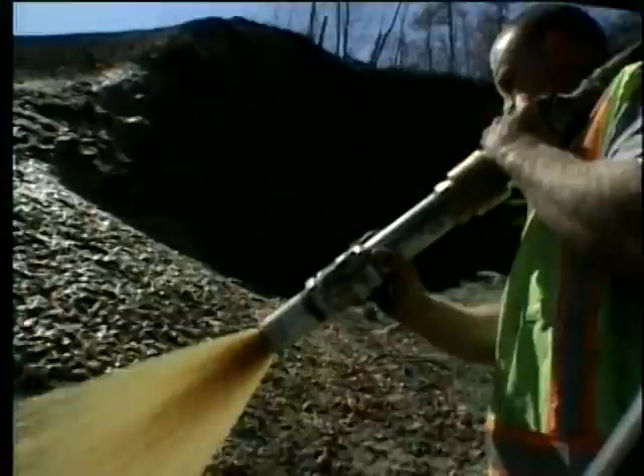MAT Incorporated and its distributor network supports our certified applicators by being there for your first application of SoilGuard and for any other project of high visibility you request. Please ask for assistance and a MAT Incorporated representative or your distributor will be on the site. MAT Incorporated exhibits at many major trade shows in the United States. We market primarily to specifiers and engineers in order to get the product on new projects. MAT Incorporated distributors will provide literature and marketing packages to you at no extra cost.

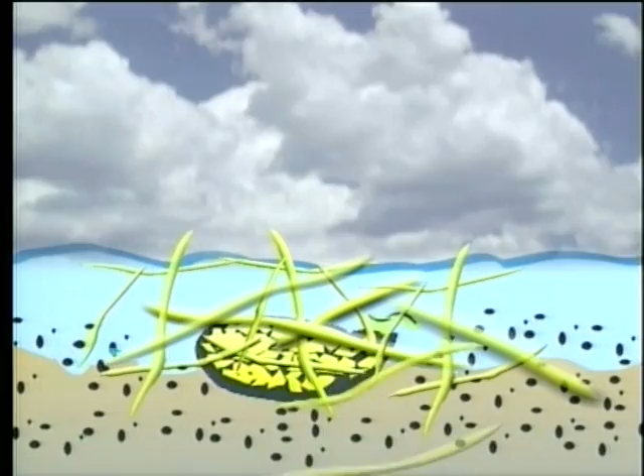What is a bonded fiber matrix? SoilGuard is a bonded fiber matrix erosion control system that provides blanket-like protection with dramatic savings in time and labor. The hydraulic application needs no special site preparation and conforms to almost any soil surface. Bonded fiber matrix is an erosion control system where fibrous materials are cross-linked together with an adhesive to create a continuous 3-dimensional erosion control blanket which adheres to the soil surface. The adhesive is a vegetable-based product called guar gum.

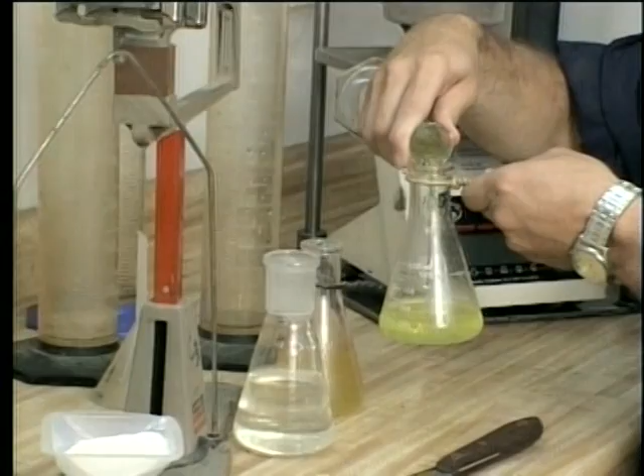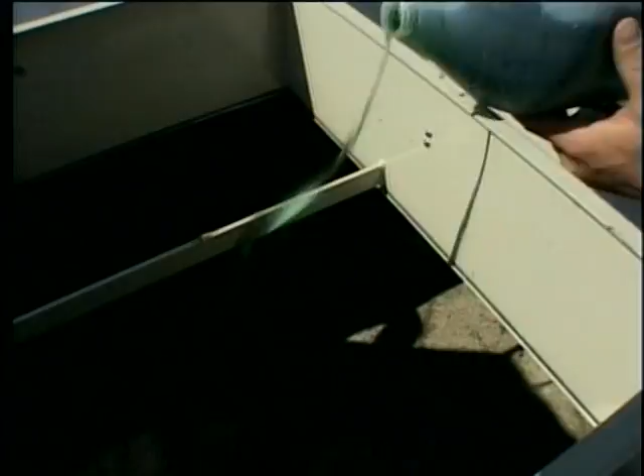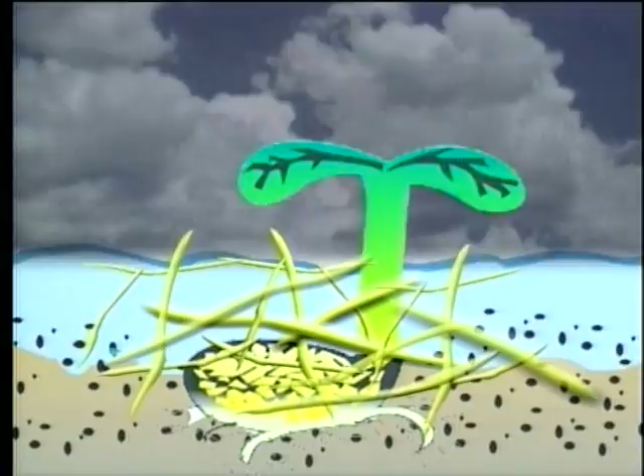SoilGuard is made from wood fibers that are manufactured longer and somewhat coarser than regular mulch for hydroseeding. The binding agents in SoilGuard are natural minerals, causing the product to cross-link together. These natural minerals are some of the same components used to make fertilizer, but are not a replacement for fertilizer. You should mix fertilizer as you usually would for each site. Once dry, the matrix becomes water insoluble for maximum protection and effective germination. After drying, it can withstand substantial rainfall, high winds, and stay in place until vegetation is established.

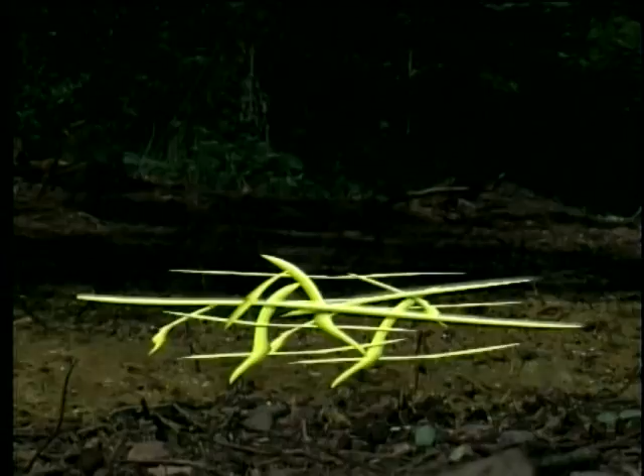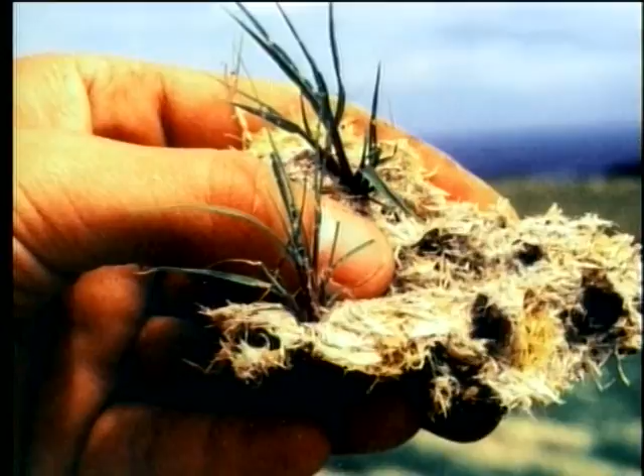Look at your demonstration sample. It represents a spraying rate of 3,000 to 4,000 pounds per acre. This is what we would normally suggest for an application. Please hold it up to the light and observe the small holes. The holes are small enough to dissipate heavy rainfall, preventing displacement of seed and soil, but are large enough to allow moisture to travel through and vegetation to grow through with ease. On the ground, the product retains moisture from the air and remains relatively soft while holding seed and soil in place. In arid climates with no irrigation, SoilGuard may remain hard, but will last until vegetation is established.

SoilGuard is not intended for the prevention of landslides on slopes that display deep-seated instabilities or that are subject to surface peeling or frost heave, extended or permanent erosion control in non-vegetative applications, as a channel liner or in areas where poor design concentrates overland water flow.

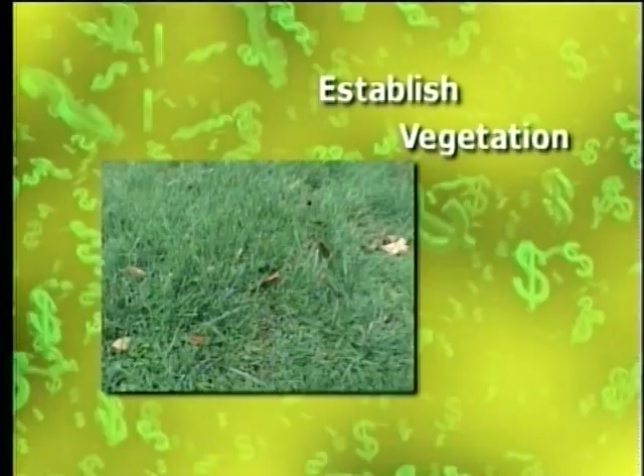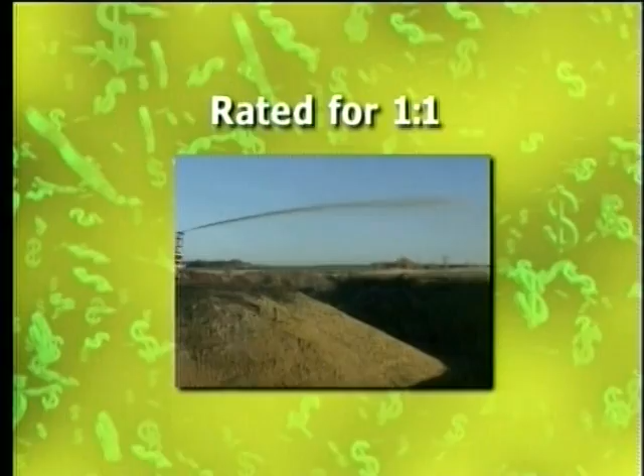Spray-on blanket-like protection eliminates the under-rilling commonly seen in rollout style blankets. Better soil protection means less sediment loss. Hydraulic mulches require less ground preparation than rollout systems and less labor than with sod or blanket applications, resulting in greater cost savings in time and labor. It's not uncommon for a 3-man crew to complete more than 3 acres per day with larger machinery. SoilGuard can be applied as a 1 or 2-step erosion control system, giving the applicator flexibility when undertaking unusual applications or when an extra measure of protection is desired.

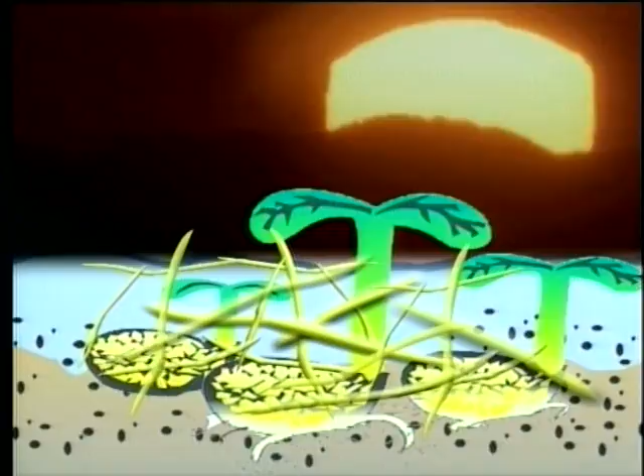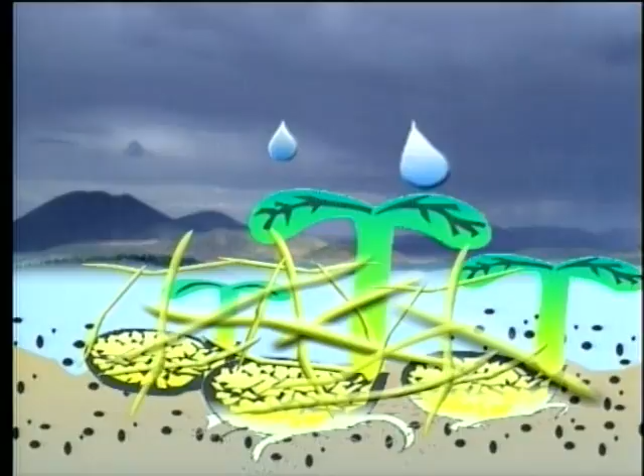Within the matrix are air pockets allowing sunlight and water to filter through to the ground below, creating the perfect microclimate. Better water management is achieved through the absorption of rainfall. This reduces the volume of water runoff and sediment loss. Experienced and trained applicators supported by MAT Incorporated and its distributors ensure a quality application for dependable performance.

A one-bag system simplifies specifications and allows for easy transportation, handling, and mixing. It reduces inventory needs since every bag is a complete and measured unit. It ensures consistent mixes, load after load. SoilGuard is 100% environmentally friendly and beneficial. As it degrades, it enriches by returning nutrients to the soil naturally. Because it's maintenance-free, there are no stakes to retrieve, and it's safe for wildlife and workers.

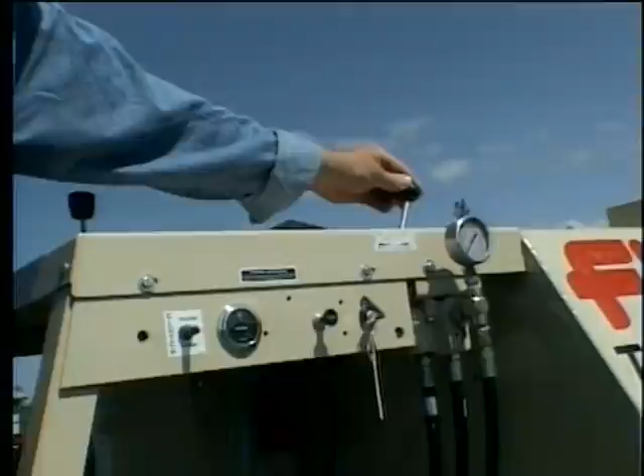All certified applicators shall have possession of hydraulic mulching equipment that's regularly maintained and in good working order. Acceptable models are machines that are equipped with mechanical agitation and a sufficient pump. Here are the required features and accessories.

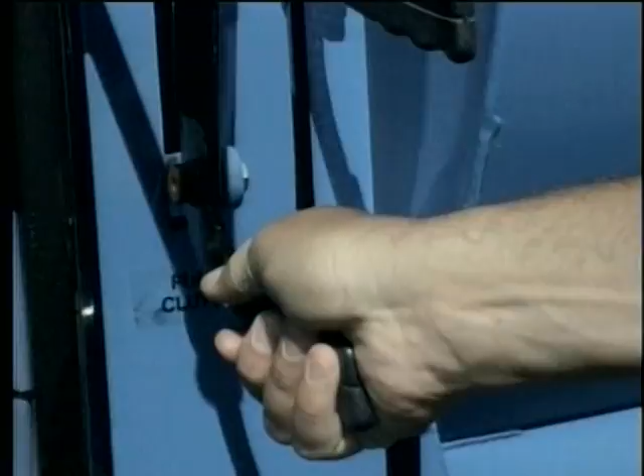A mechanical paddle or agitator. A pump disconnect clutch or other mechanism to operate agitators separate from the pump while mixing. A recirculation control valve to control the amount of flow recirculating back into the tank. All equipment shall be able to pass OSHA inspection and certification.

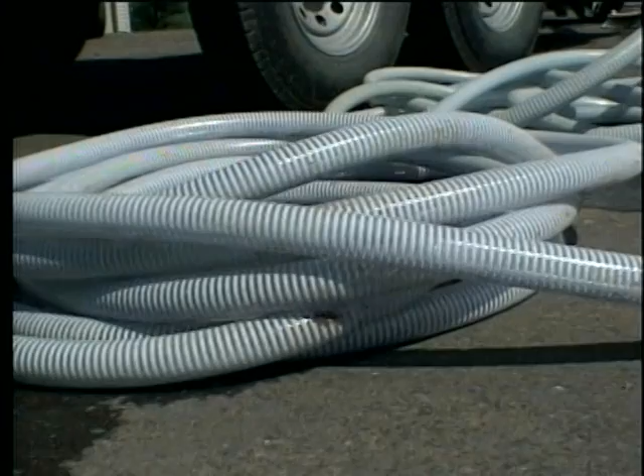A minimum of 100 feet of high-pressure hose, couplings, and extra washers. An assortment of spray nozzles with straight 50-degree fan and 15-degree fan minimum. Adequate safety equipment, including dust masks, safety glasses, safety vests, and hard hats.

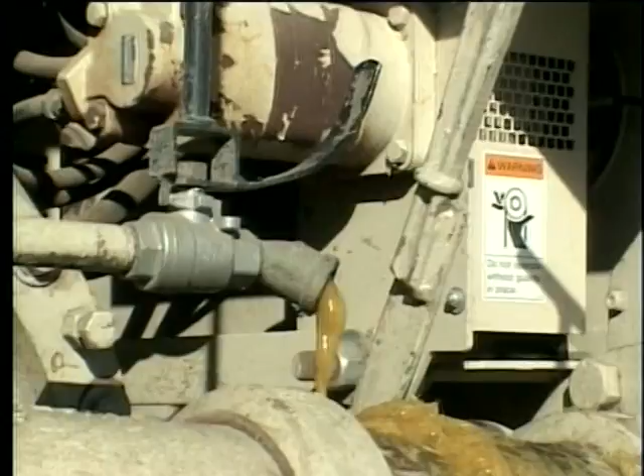A measuring tape or wheel, marking flags, stakes or paint, calculator, miscellaneous hand tools including shovel, pipe wrench, and screwdriver. And we also recommend an air bleeder valve on the discharge side of the pump, reversible agitation, and a hose reel for trouble-free application.

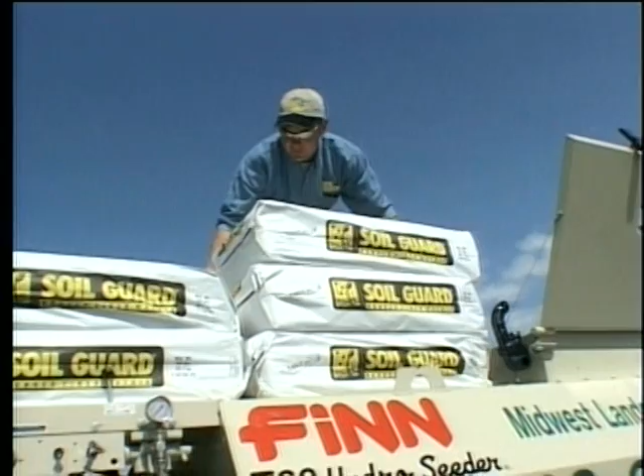Instructions for mixing and application. Startup procedure. For pre-mixing, purge the pump, pipe boom, and hose with clear water. Consult the chart to determine the number of SoilGuard bags required to cover the job site or to mix the determined volume. Position the required number of bags on top of the hydraulic seeding machine and prepare for loading by opening the bag ends. Fill the machine with sufficient water, level with the main agitator shaft.

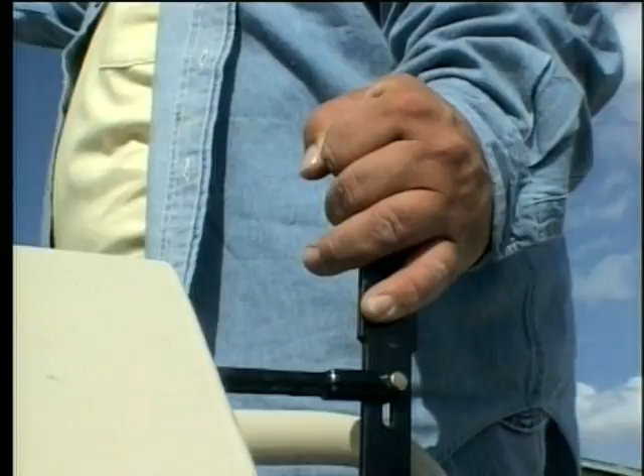Start mixing agitators and regulate throttle throughout the loading process to achieve moderate agitation. Do not engage recirculation systems. Load SoilGuard through the loading hatch. Start application, moving the paddles to break up any lumps. Mix SoilGuard at a ratio of one 50-pound bag to 100 gallons of water.

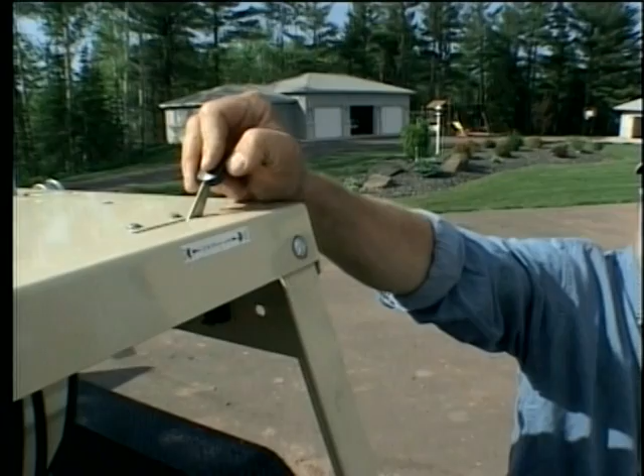Each bag contains a water-soluble packet of activator that requires no handling. Simply let the packet fall into the tank during loading. Add seed and fertilizer during this step. Continue adding water to correct depth for number of bags and agitate at moderate throttle. After correct water depth has been reached, advance the throttle to full and vigorously agitate. Return to moderate when all floaters have disappeared.

Agitate slurry on moderate throttle for a minimum of 15 minutes after loading to allow for thickening. Near freezing water temperatures will require more mixing time. Perform the free liquid test to ensure suitability of slurry for application.

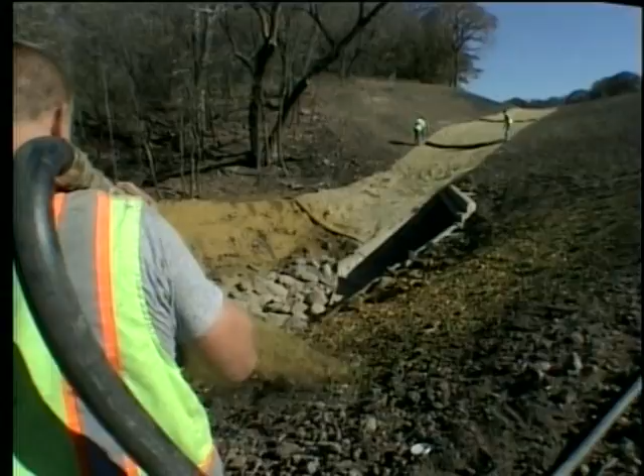Apply slurry from 2 opposing angles in even layers, working back and forth for uniform coverage of soil. For best results, fit hose or cannon with a fan or slit-type nozzle to create a gentle and finely dispersed spray that rains down on the soil.

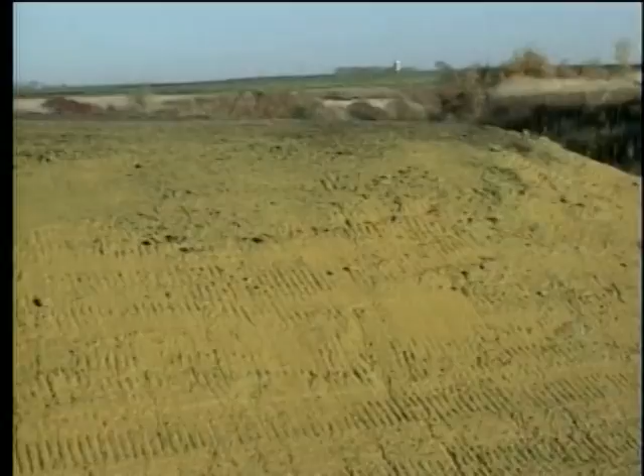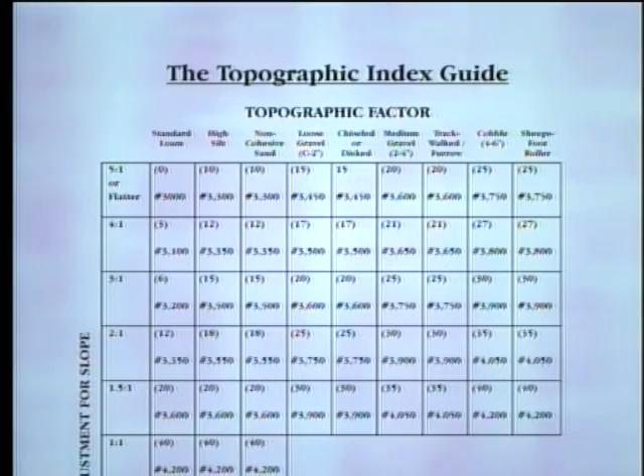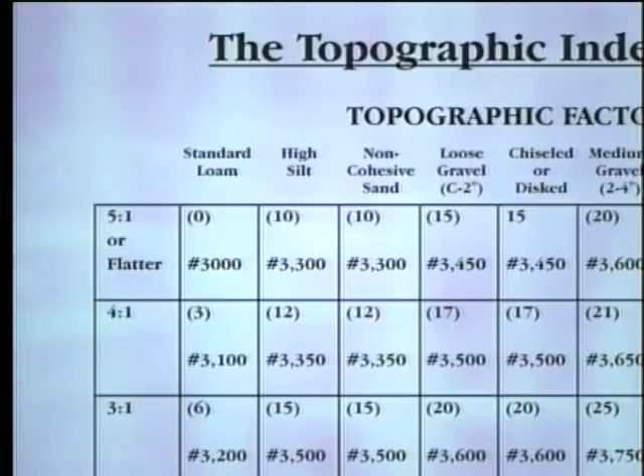The purpose of the Topographic Index Guide is to provide designers and contractors a more accurate means of estimating factors that can increase the amount of SoilGuard needed for appropriate and effective coverage. Let's take a look at the table. The left side of the guide shows the adjustment for slope rows. They range from 5:1 or flatter at the top to a slope of 1:1 at the bottom.

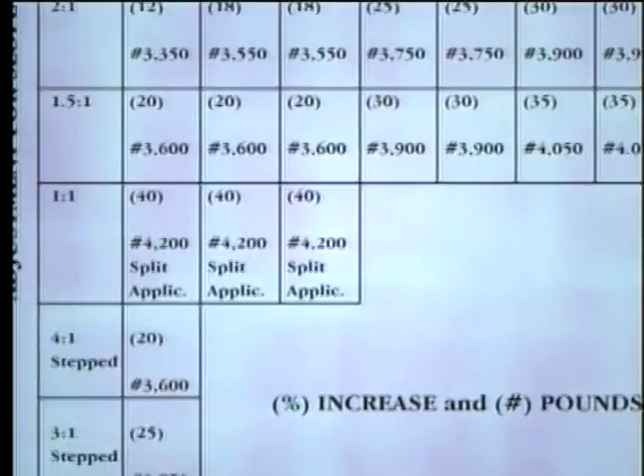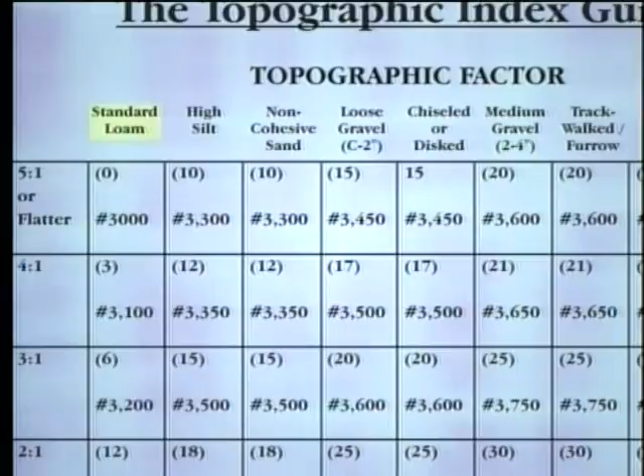Column headings at the top of the guide show topographical factors. These topographical factors describe an array of different soil types and surface textures, ranging from the smooth-textured standard loam on the left to the rough-textured sheep's foot roller surface on the right.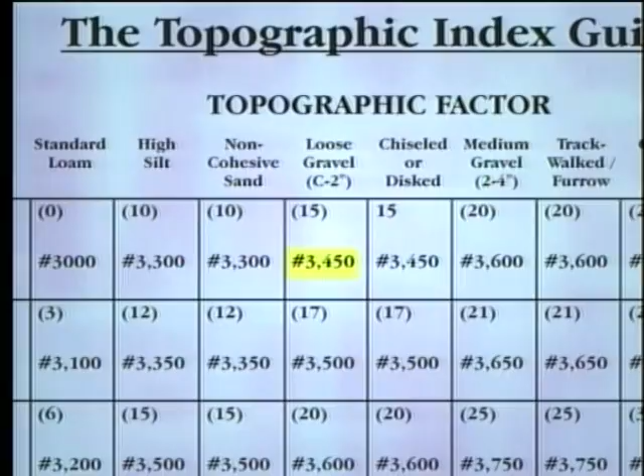The larger number indicates the estimated total pounds per acre of SoilGuard needed to achieve appropriate and effective coverage. Some adjustments have been made in the estimates based on actual field trials and are rounded to the nearest 50-pound bag.

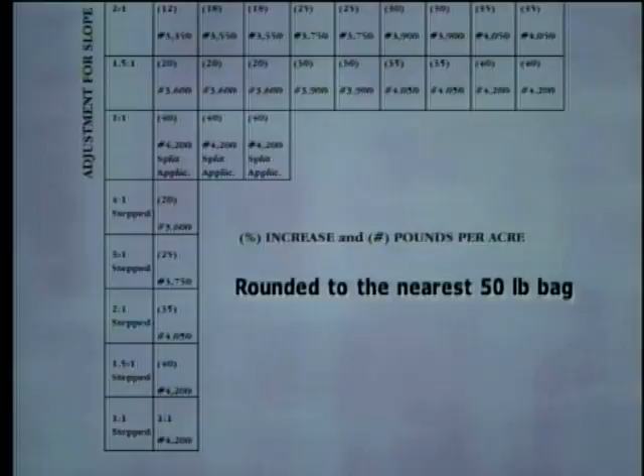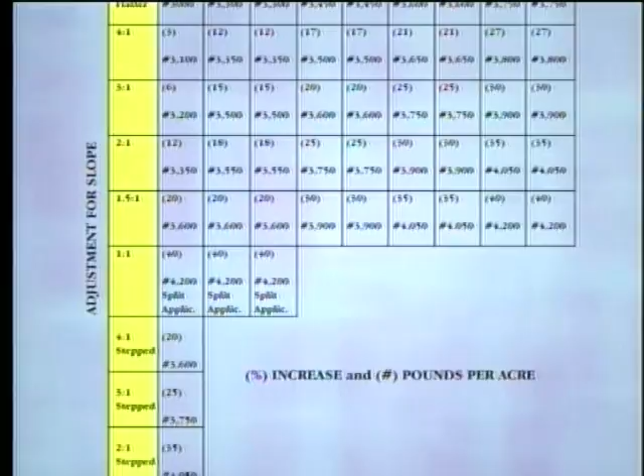Using the Topographic Index Guide is a simple 3-step process. Estimate the slope of the area to be treated and find the appropriate adjustment for slope box on the left side of the table. Then pick the topographic factor column heading which best describes the soil and surface texture of the area to be treated.

Find where the adjustment for slope row intercepts the topographic factor column. It's here you will find the percentage increase in surface area in parentheses and the total pounds per acre of SoilGuard required for appropriate and effective coverage.

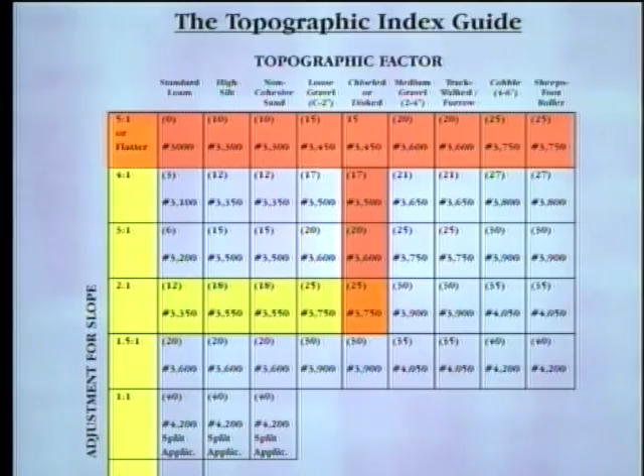Let's look at an example. Notice on a 5:1 slope of standard loam, a 3,000 pound per acre application is appropriate and effective coverage. However, if that same 5:1 slope has been track walked, the surface area increases by 20%, requiring an additional 600 pounds per acre, or 3,600 pounds total of SoilGuard to achieve appropriate and effective coverage.

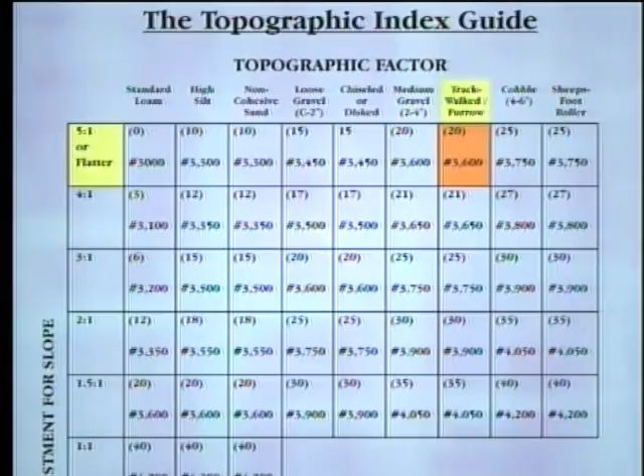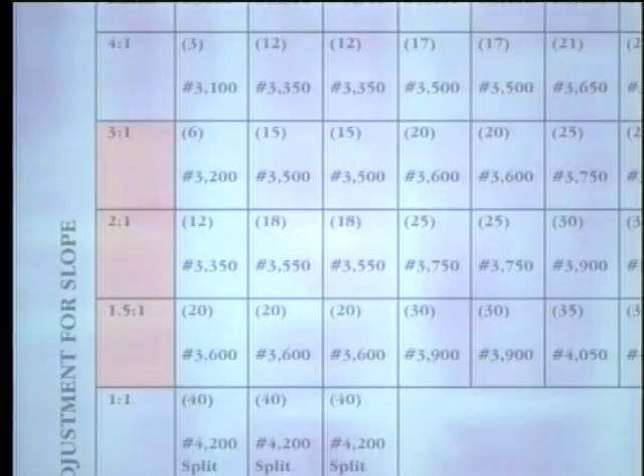Notice when we move down the table, as the slope increases, so does the amount of SoilGuard needed for appropriate and effective coverage. Measurements for slope must be based on the actual field measurements. Engineer drawings and actual field measurements will differ.

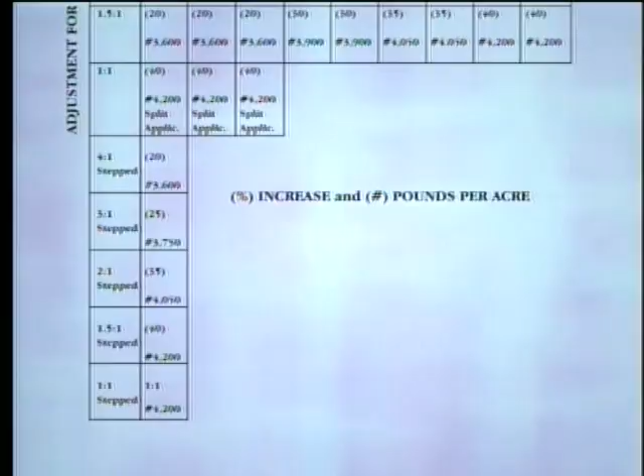As can be seen in the table, both the slope and the differences in topographic factors have an effect on the amount of SoilGuard needed for appropriate and effective coverage. In addition, the effects of both conditions are cumulative. By practicing with this table, you'll quickly gain proficiency in making the appropriate adjustments and calculations when submitting bids or estimating coverage.

The free liquid test. The free liquid test is a quality control measure that ensures proper mixing and easy application of SoilGuard. The slump board has rings that are 1 inch apart. A cup has been included. For safety, turn the agitator off, then fill the cup with slurry from the machine tank. Put the bullseye over the cup and flip it over.

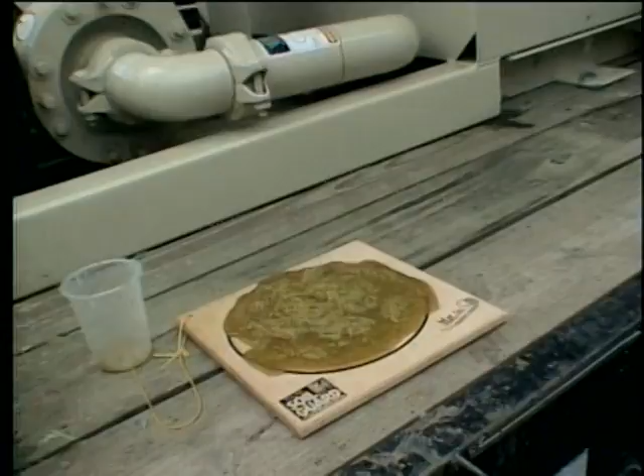Now, hold the board flat and wait 1 minute. Do not put the board on the deck of the machine, or else vibrations may cause a misreading. After 1 minute, observe the board. Free liquid may be seen flowing away, forming a ring around the fibrous mass in the center of the board.

In order to pass the free liquid test, the free liquid must flow less than 1 inch in 1 minute. If the free liquid travels more than 1 inch in 1 minute, the slurry has failed. There may be several reasons for this. First, check that the slurry has mixed for the required 15 minutes. Note, near freezing water temperatures will require more mixing time. If not, continue mixing and repeat the free liquid test.

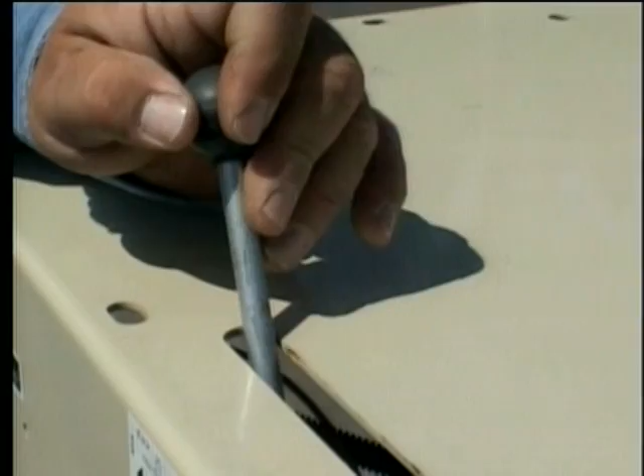Second, count your empty bags to make sure you've loaded the proper amount of SoilGuard. If not, add the needed amount, mix, and repeat the free liquid test. If you're certain there is enough SoilGuard in the tank, turn off the agitator and check for large clumps. Check the corner areas of the tank. Almost every machine has a dead spot where materials tend to hang up. If you see any, dislodge clumps and turn the agitation on at full speed until they're dispersed. Then repeat the free liquid test.

Here's an example of a good slump test. With a good slump test, you'll be able to apply SoilGuard easier. It will adhere to even the steepest slopes and lay down consistently.

Proper use of personal protective products is always important. All operators must wear dust masks, eye protection, and hard hats in designated areas. Only 3 people at a time should be on the truck or machine during hydroseeding operations. A grate for the agitator hatch must be closed before dumping product into the tank for mixing.

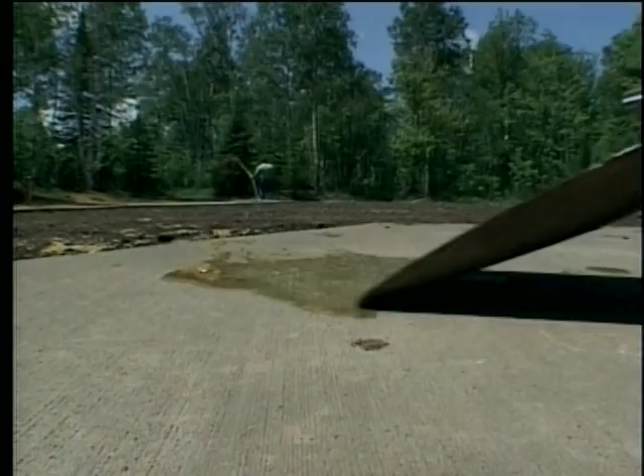Choose shoes or boots which do not have slippery surfaces. All spills are to be cleaned from standing areas immediately to avoid injury. The guar gum makes SoilGuard extremely slippery when wet. All hoses, nozzles, and accessories must be checked for defects prior to use.

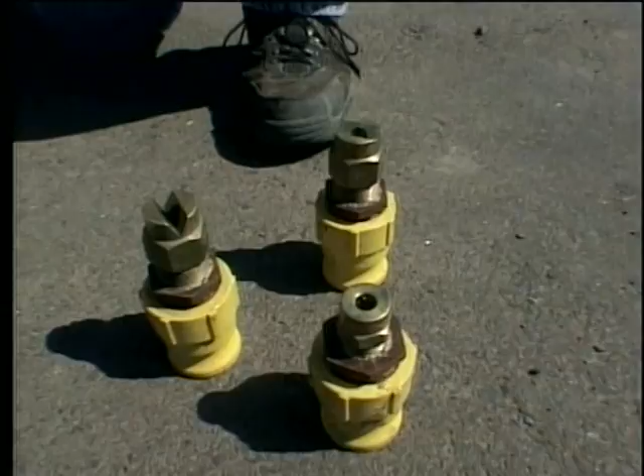Let's apply the first load. You'll need a fan nozzle. Choose the one that you like the best for spraying lawn work. For ease of application, it's recommended to use the hose attachment and not the tower for your first load of SoilGuard bonded fiber matrix. This will allow you to know the product and how it's different from other hydraulic planting mulches.

When applying SoilGuard, you'll need to achieve 100% total ground coverage. The best way to do this without applying your first layer too heavily is to rain the SoilGuard onto the ground in light and even layers to avoid shadowing or unprotected areas. Apply SoilGuard from at least 2 different directions.

Remember, you're applying an erosion control system comparable to an erosion control blanket. 100% coverage is key. You can visually tell if you have achieved 100% coverage if there's no soil showing, and if the product forms dimples, much like the surface of a golf ball.

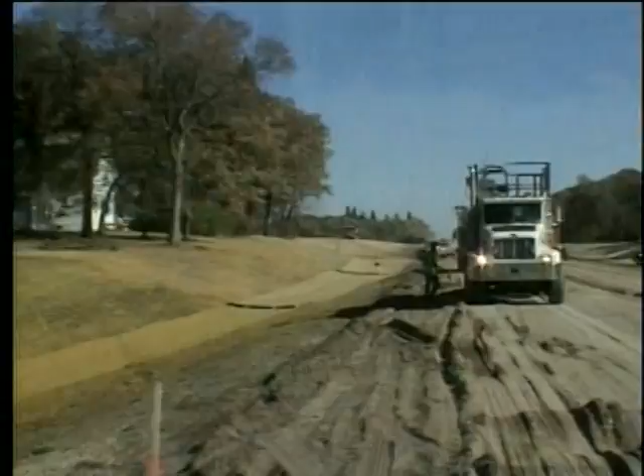Like an erosion control blanket, SoilGuard should be applied over the top of the berm. Capping the top of the slope will prevent water shear from damaging the leading edge of the application area. When possible, tie the SoilGuard into any existing vegetation.

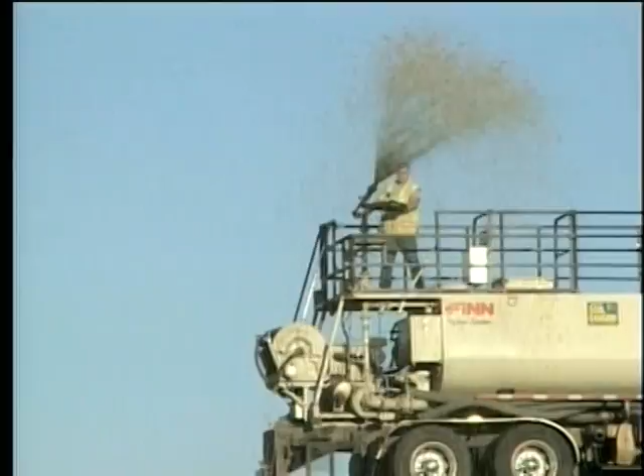If you have applied SoilGuard at a rate heavier than specified, it will begin to slide because of its weight. If that happens, you'll need to return to the site after it's had time to dry and then reapply the product to these areas. When shooting from your tower, it's still recommended that you use a fan nozzle and apply in lifts to rain the product down. If the situation calls for a distance nozzle, avoid spraying directly onto a steep area. Continue to rain the product onto the soil surfaces.

You've already seen from the topographic index guide the effect different soil types have on calculating coverage. Here are some techniques to help you recognize these different soil types. Some conditions require a few extra steps. Sand and high silt soils are very dry and will peel and fall due to the weight of the SoilGuard.

If you experience this or you think you will, we recommend you first apply a very light layer of SoilGuard at a rate of approximately 1,000 pounds per acre of product. Allow this area to dry slightly as you work other areas. The partially treated soil will now be able to hold the SoilGuard as you finish the application.

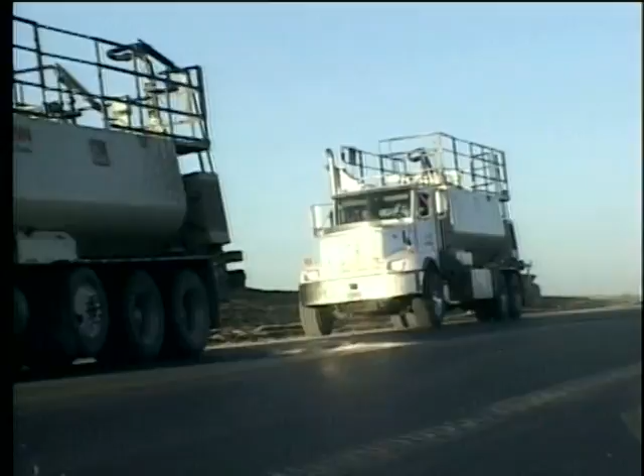Clay soils can also be challenging. Sometimes SoilGuard will slip, much like on sand. A smooth clay slope is the most difficult. Again, it's recommended a very light layer of SoilGuard be applied. Let it dry completely. Depending on weather conditions, this will probably take an hour or two. Then, return to the site and apply the proper application. Remember to layer SoilGuard by shooting in at least 2 different directions to achieve 100% ground coverage.

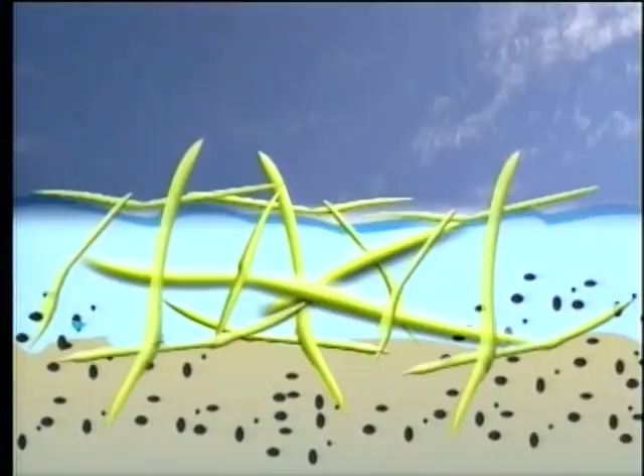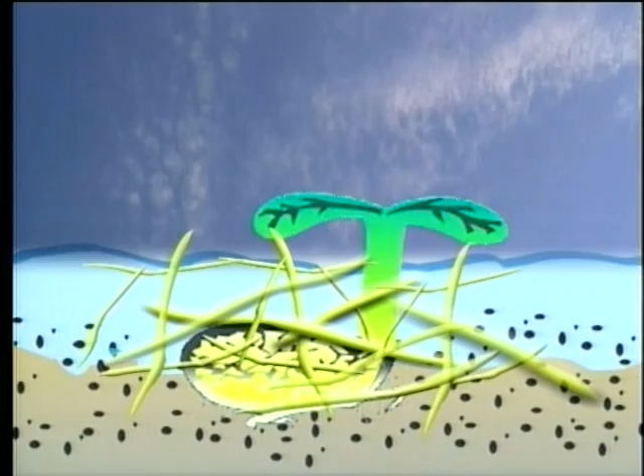After completing your application, thoroughly clean all equipment and hoses. Do not let SoilGuard set overnight or for extended periods of non-use. SoilGuard's curing process is very simple. It depends solely on using the natural element of the sun and wind to dry the water used in the application process. SoilGuard must first dry in order to perform like an erosion control blanket. Never apply SoilGuard to waterlogged or saturated soil.

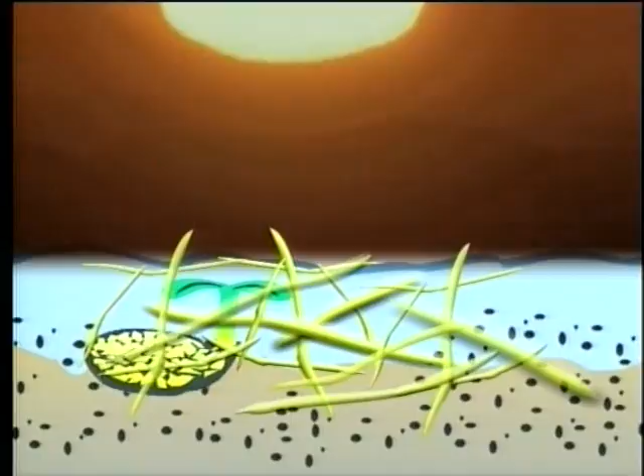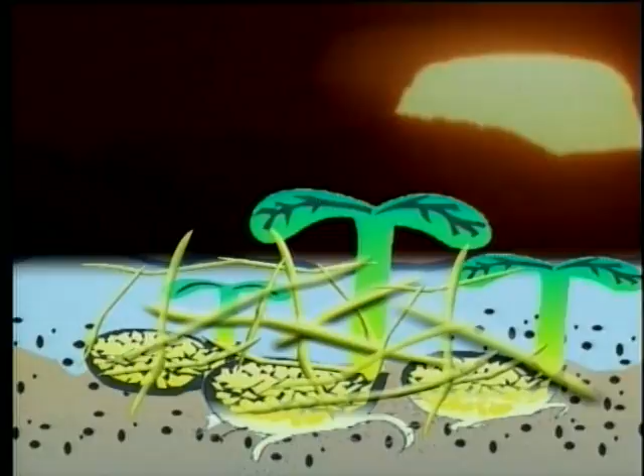MAT Incorporated recommends that 24 hours of dry weather follow the application. SoilGuard applied at 3,000 pounds per acre will dry under favorable conditions in less than 24 hours. Observations have shown that SoilGuard may completely dry within 2 to 4 hours. In estimating ideal conditions, many factors may have an impact on drying time, such as wind, sun intensity, humidity, slope orientation, and pre-existing soil conditions.

If you're unable to schedule a SoilGuard shoot due to a possible rain event, it's okay to spray at a rate of 1,000 pounds per acre and return to the site when conditions are favorable for 100% coverage. This technique allows crews to keep busy during periods of marginal weather without risking the whole application. SoilGuard can be very effectively built up in layers without compromising the final product quality or performance.

You'll soon be covering new ground with the most innovative erosion control system the industry has ever seen. Your skills and experience as a hydraulic mulch applicator will help you consolidate these new techniques and help you succeed as a SoilGuard certified applicator. A few rules will help you organize your approach to learning these new techniques and speed you on your way to success. Rule number 1. Remember, with SoilGuard, you're building an erosion control system on site.

The minimum required application rate is 3,000 pounds per acre, which is much heavier than ordinary mulches. SoilGuard covers most soils with as little as 1,000 pounds per acre, but you'll need to apply a full recommended measure in order to achieve a blanket of the required thickness. Anything thinner will not provide the protection necessary to ensure proper erosion control and plant germination.